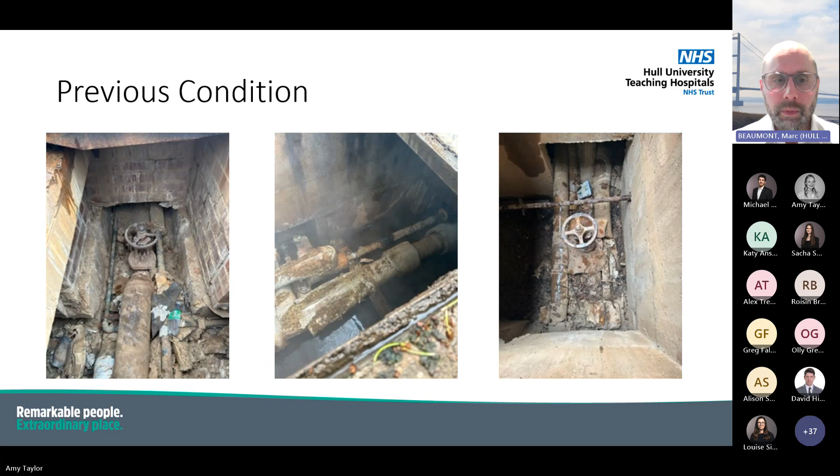So some examples of what some of our insulation and pipework systems look like prior to starting the work. So we did some initial investigations on the network. A lot of the network being underground services meant it's difficult to get access to inspect all of the locations. But these were some of the access areas we could get to. If we move to the next slide, please.

So what we found was a lot of the pipework had collapsed to the bottom of the ductwork, which had obviously also had the result of the insulation wetting out if there was rainwater ingress into them. So we had a lot of issues around failed insulation. There was also the brackets, which we didn't realise had failed when we did our initial investigations. So that again increased the work that was required to be able to reinstate the system.

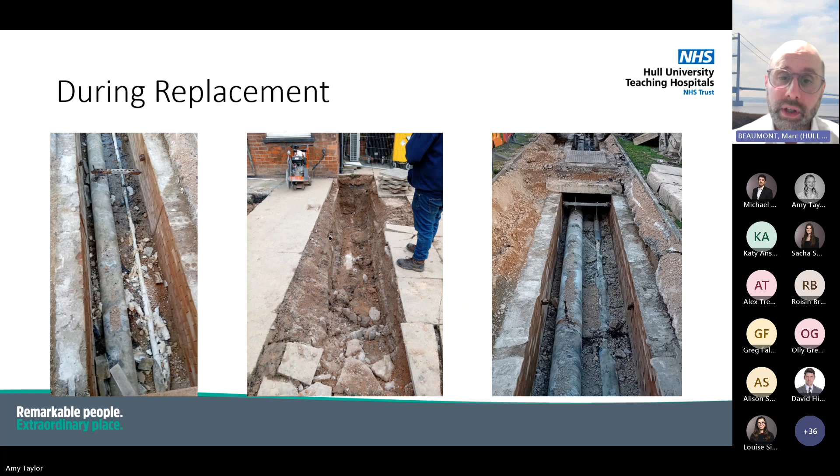So this is what they look like before we reinstated the covers. So new brackets installed, the pipework fully supported along its length, and with new insulation. You can just see some of the concrete slabs to the right of the right-hand side image, showing what normally covers the ductwork before the soil is reinstated over the top. Can go to the next slide, please.

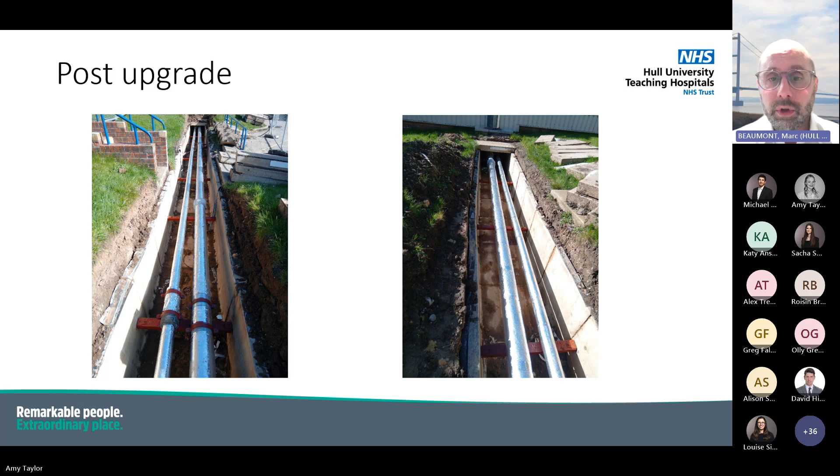We've just got a few final images of some of the larger sections of distribution pipework, and again you can clearly see the concrete slabs there which cover the service ducts and show the work that's gone into it. There was an awful lot of work gone into maintaining and gaining access to all these areas around the site, which was one of the challenges. If we can just move to the next slide, please.

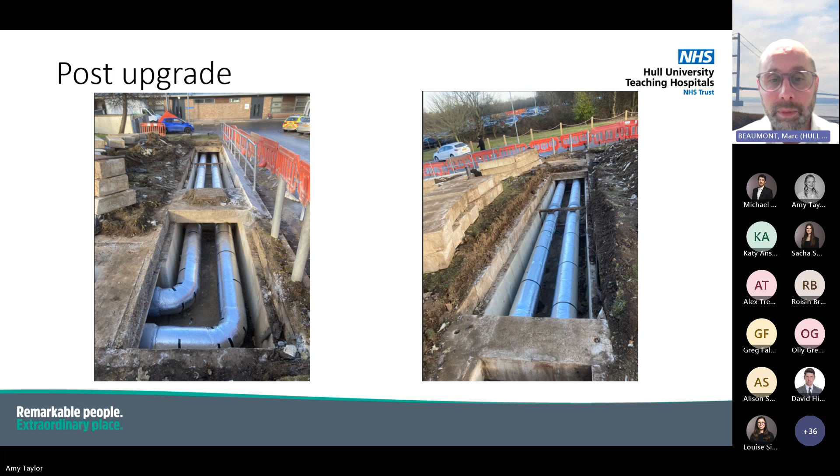Although we originally got our funding in September of 2023, following then tendering the work, we had a number of delays to that. Some of those were due to access delays, due to requiring road closures in a number of areas, which could only be planned in with other works that were happening on site. There were some sections of insulation where, in order to remove the asbestos, there were some delays there, which again caused further slippage into the programme.

But I think the biggest challenge that we found was just the condition of the pipework and infrastructure. There were certain valves where we couldn't isolate systems to be able to work on them safely because the valves just couldn't be accessed to be maintained. And just the fact that working on buried services gives some real unexpected issues, which are hard to plan for if you can't get access to them to survey them.

So for us, we ended up incurring additional costs that the organisation had to fund, but just something to be aware of when working with buried services. Go to the next slide, please. So in total, we installed just under 2,000 metres of pipework. Sorry, not pipework, insulation.

That includes steam pipework and condensate pipework. We fitted 22 heat meters. They're just finalising being commissioned at the moment. And unfortunately, we don't have the energy savings as yet due to the fact that we only completed the project back in December 2024. So we're still collating the data from the current heating season to be able to get some indicative savings through the winter period.

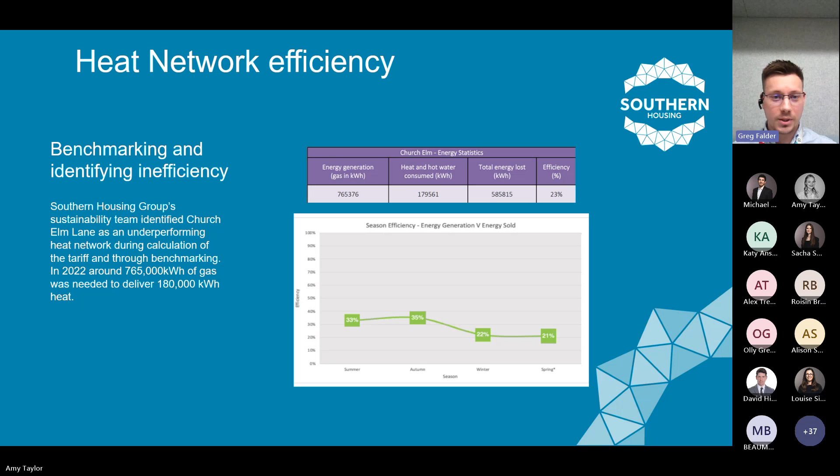Just going into how that inefficiency affected cost as well in relation to the heat tariffs. So we calculate heat tariffs on a scheme by scheme basis, rather than aggregated across a number of sites. So a particularly inefficient scheme will have a particularly high tariff. Prior to the energy crisis, this was almost masked in a sense. Gas prices were quite cheap, and even with very poor efficiency, we were seeing a tariff of about 10.37 pence per kilowatt hour, including standing charges, and consumption of about 2,500 kilowatt hours a year. We calculated this would give an annual heating bill of about £405.

So not unaffordable for most people, and it almost served to mask some of the inefficiency of the scheme. This really became an issue during the energy crisis when the price of gas increased drastically, and the tariff went up to 32.3 pence per kilowatt hour. We calculated, based on the same level of consumption, this would result in an annual bill of about £950 per year.

It quickly became incredibly unaffordable, and based on I think the running definition of fuel poverty, we were seeing quite high instances of fuel poverty at the scheme. That had a number of knock-on effects on residents' health and well-being, their engagement with the heating system, with the billing agent, and a number of other issues.

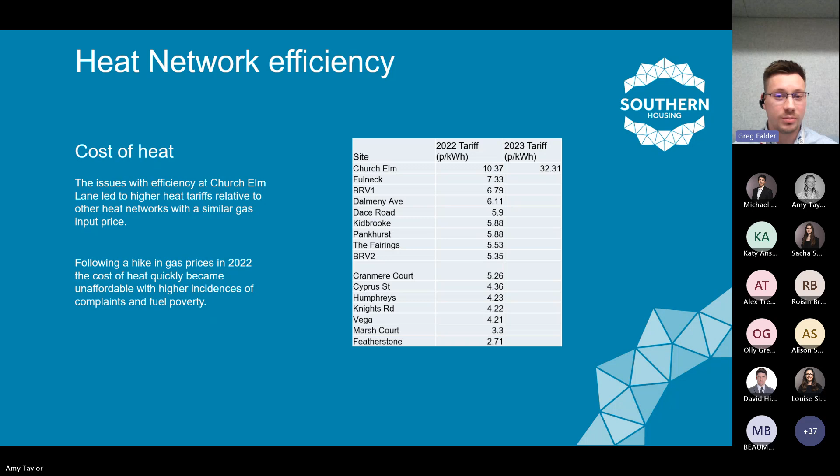So going into this optimization study, we were lucky enough to work with a CIBSE qualified heat network consultant. I think there are only about 100 registered in the country last time I checked the register, but we've had really great experience working with a small number of consultants, particularly at this phase of the project.

Just to give you an overview of the findings, kind of broken down by constituents, so the plant room, distribution, and within the dwellings. The plant room, the analysis confirmed the efficiency that we were seeing from our desktop analysis, so about 23 to 28%. We were seeing a delta T on the flow and return of about 4 degrees Celsius, and this meant that water was coming back into the plant room well above 60 degrees.

My loose understanding of how modern boilers operate is that this wouldn't facilitate the boilers to condense, and we'd see a pretty immediate drop in efficiency, or rather we'd see quite an increase in efficiency if we were to address that delta T and get those flow temperatures down, get those return temperatures down.

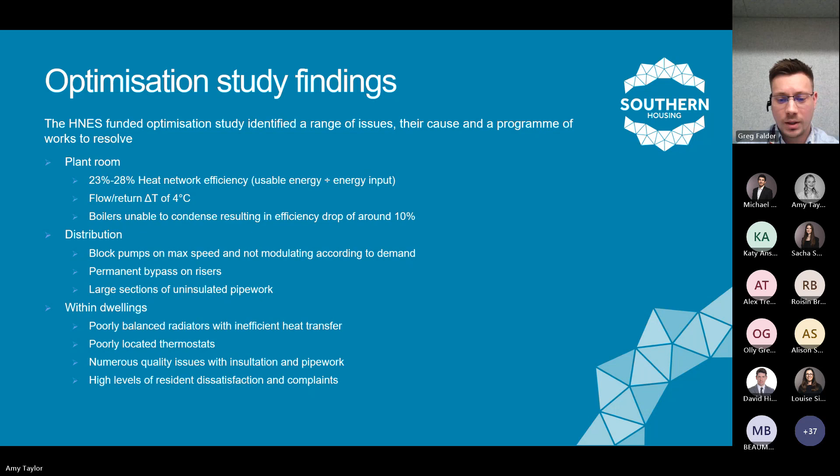Next slide, please. So moving on to the capital works program that led from the optimization study. We were awarded in the region of 175k on a 360k works program. The scope of works, again, starting from the plant room, included recommissioning the pumps and the BMS, focusing on water quality, which is something we've really listened to our consultants on around how important it is for the longevity of the system. And again, given the context of the scheme, maximizing the asset life is really, really important for us as a housing provider, if we're to do it affordably.

Regarding the distribution, we had differential pressure sensors fitted to the block pumps, which I believe was in aid of ensuring the pumps modulated their speed based on demand. We fitted new riser bypasses and re-insulated certain parts of pipework. Within dwellings, we had new HIUs, we had presettable TRVs and rebalanced radiators, and I think I've mentioned thermostats were also relocated to a more favourable position. On to the next slide, thanks.

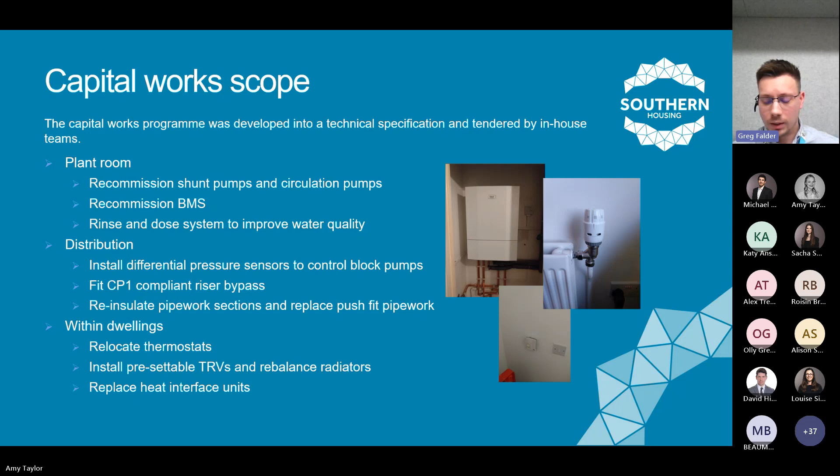So the impact. The project finished around March 2024. So we're really going off data since then, and particularly the most recent winter. So, we expect these figures to be confirmed and be able to monitor it over a longer time period. But in terms of energy and carbon performance, we're seeing the efficiency of the heat network now across this winter has been 48%, compared to 23 to 28% previously. We did set a target of 54%, and we think we will hit that in future.

One issue we've had is a number of heat meters haven't been reading this winter. We haven't extrapolated that data in a lot of cases, so we think our heat use figure is lower than the real figure. And as we get better heat meter data, we're expecting that that figure will creep up alongside ongoing operational management of the heat network. We're seeing about 35% reduction in baseline gas use, which I think is in line with our expectations and really vindicates the project. By our calculations, that's around a 90-ton reduction in CO2 annually, which again, we're really happy with.